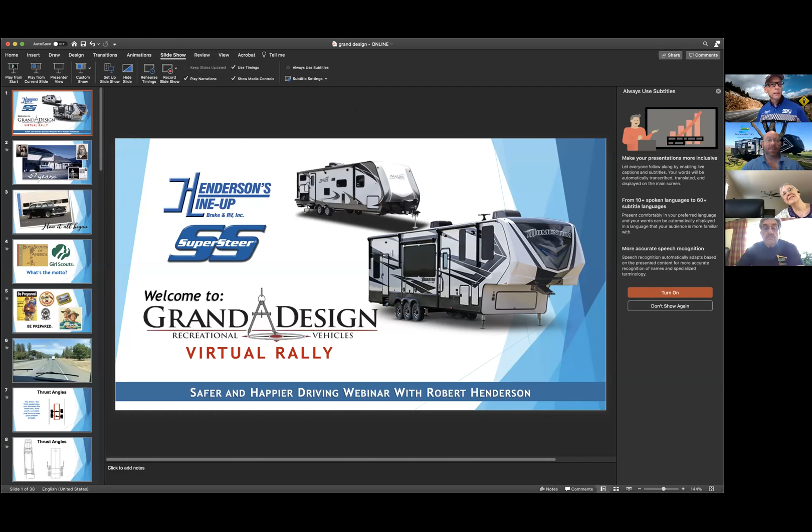All right, good morning, we are ready. Let's jump into this. Welcome to the Grand Design Virtual Rally, good to have all you folks here today. My name is Robert Henderson, and we're going to talk about safer and happier driving, and I'm privileged to do this with Jeret. Jeret's been involved in one of these with us earlier this year. You may not know it due to my technical ability here, but I usually have somebody doing all that kind of stuff for me. So we're going to jump in here and get started.

I'd love to personally meet each one of you - that's what I usually do when I do a seminar. I go around, shake hands, find out where you're driving and where you're from. I'll talk a little bit about where I'm from.

This is where we started out 57 years ago - maybe even another year on top of that now, actually. Well, it was, yeah, because we started in 1961. We moved up from Fort Bragg, California, and my dad was looking for a business he could teach his boys. He was actually looking for a parts house, couldn't find one, so he wound up buying this lineup and brake shop. I appreciate my dad, and I appreciate this. He was in World War II, flew fighter bombers, was in D-Day, the Battle of the Bulge, and so thank you to any of you who have served out there - grateful for you putting your life on the line. When I was a kid growing up, working for my dad, we literally grew up in the business.

My mom fed me with a brake spoon when I was a kid because her house was connected to our shop. So I love what we do and grew up around it.

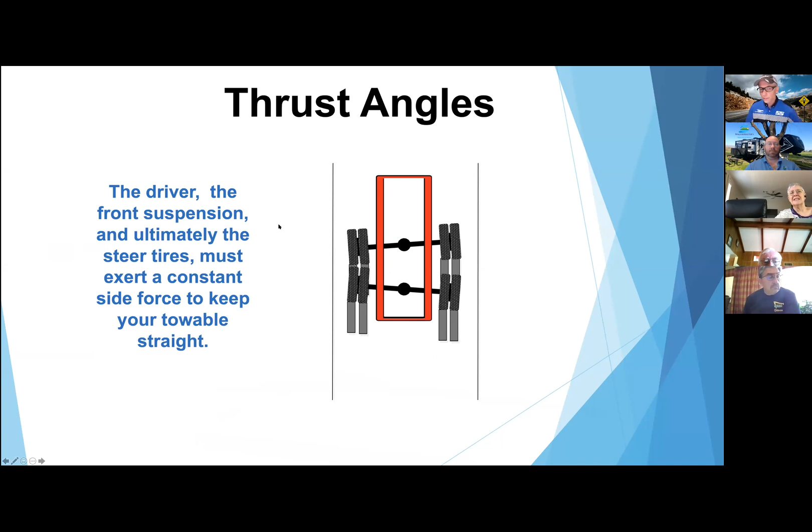So that's one of the things we like to take a look at - trailer alignment. We talk about thrust angles. The rear axles create thrust angles. The driver, the front suspension, ultimately the steer tires must exert a constant side force to keep your towable straight.

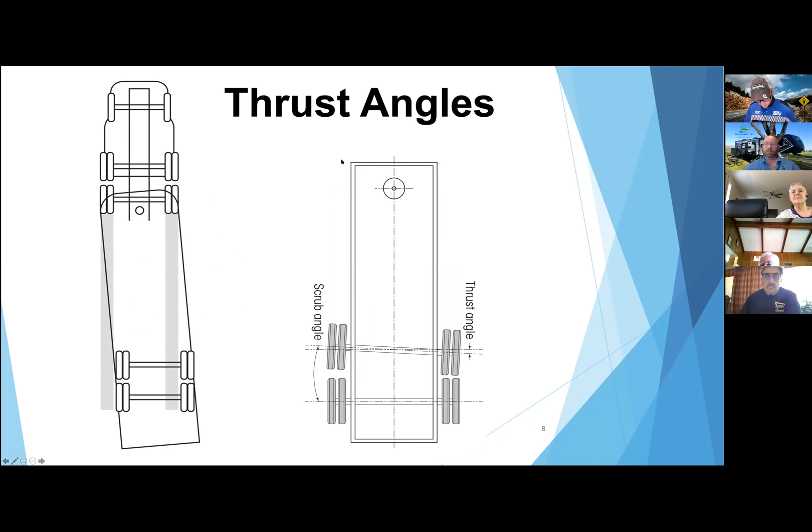So alignment's very important. When we do an alignment, we like to line everything up to either the kingpin or your ball mount when we do our wheel alignment, so everything's set in relation to that, and we get a very straight, true pulling trailer. We use the same equipment that we would use lining up a semi that runs 10,000 miles a month. Why is that important? It's going to give you better tire wear, and cut the air drag, better aerodynamics. So very important, trailer alignment.

Thank you, Barbara. And I really appreciate that my wife can help me drive, because I do have a little bit of problem with getting sleepy. I got this picture in my den on my wall. I tell people, when I die, I want to die peacefully like my grandfather did in his sleep, not kicking and screaming like the rest of his passengers.

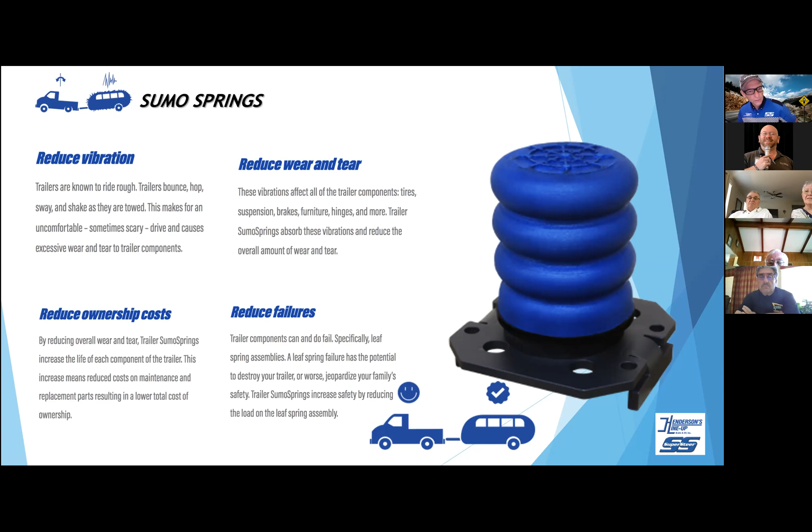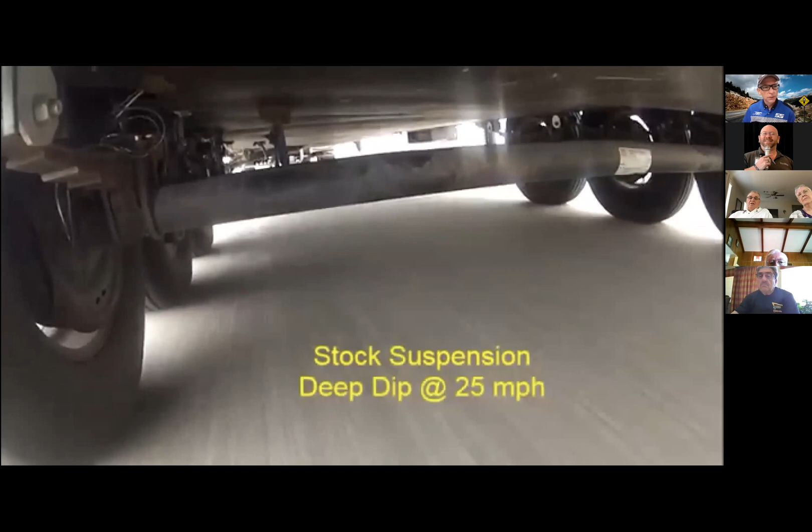I think I have a video coming up here. Let's see if it's going to play for us. This will show you Sumo Springs in action, I believe this is a triple axle trailer, a 3-axle toy hauler. You can see those springs really getting pushed there.

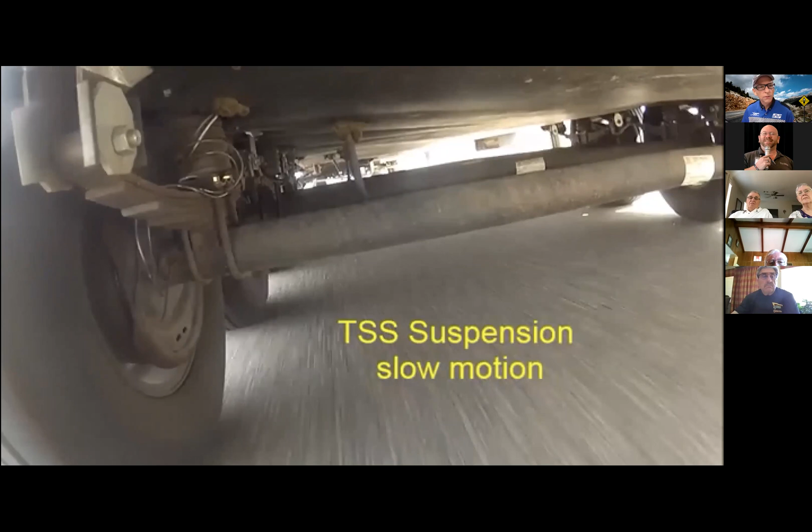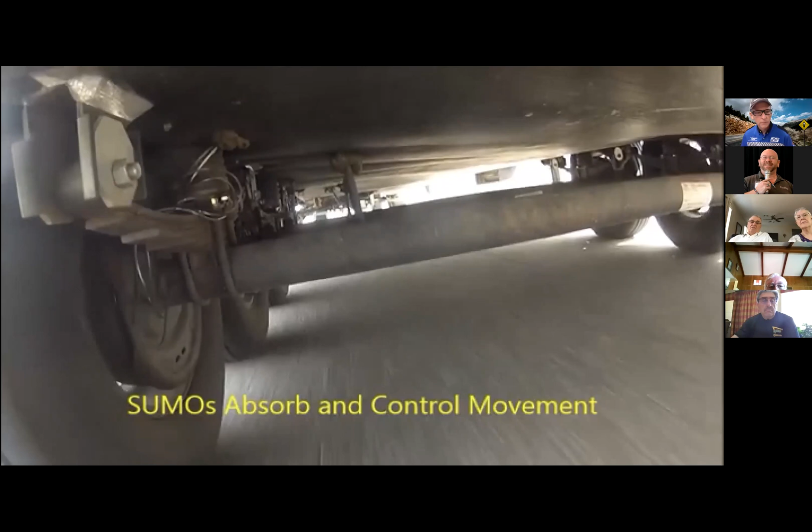I got slow motion, you see the sumo springs up in here, and there they are, absorbing that force, absorbing that energy. Sway dramatically reduced. It's interesting, if you watch those axles, you can actually see those axles flexing as well, how the camber changes over bumps. When you hit bumps, they're flexing.

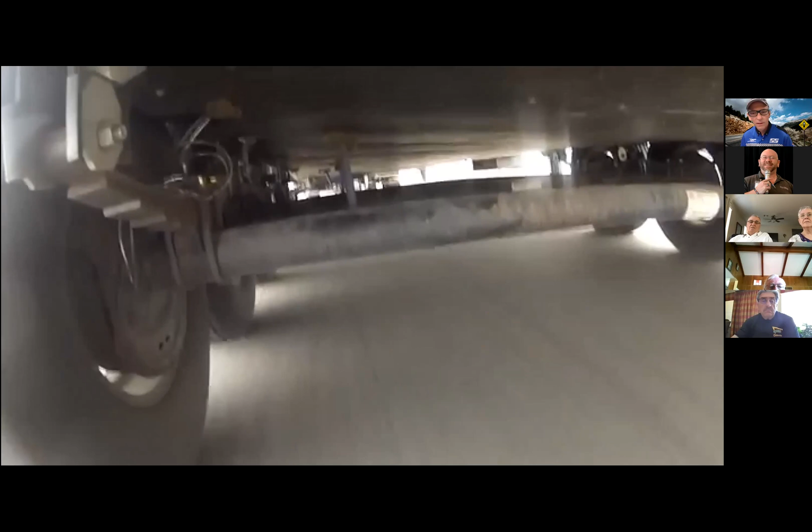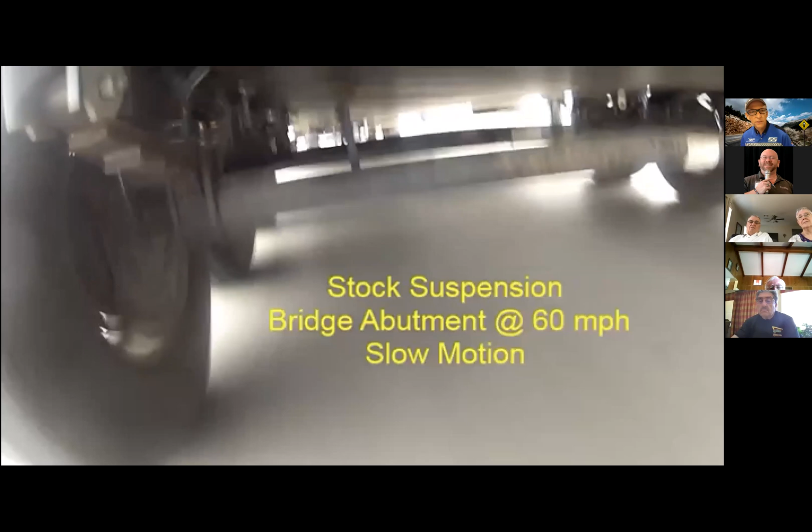Bridge abutment, and we love those bridge abutments, or there's some nasty ones out there. Stock suspension, you can see that thing hammering. Now, a lot of vibration. It's amazing the suspensions hold up as good as they do.

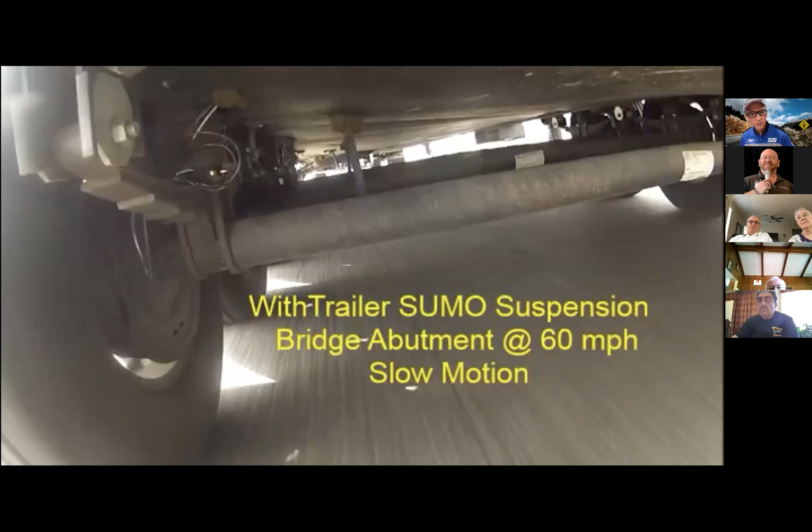Okay, now we have the sumo spring on there. Here it is up there. See, a lot of that energy is being absorbed into it.

Let's move on here. Some other products people talk to us about is the MORryde, and the idea with the MORryde is you're increasing your travel from 2.5 inches to a total travel of 4 inches. They also have another one called the SRE 3000, which gives you about another half inch of movement up and down. But the SRE 4000 has rubber inside of this box, so it's going to give it more travel, basically. There's also some different bushing options.

We see a lot of problems around these, especially the thinner metal shackles. We'll see witness marks where these have been getting loose and working around. There's so much stress put on a trailer when you're backing in and out, a lot of side load taking place on these things. So there's heavier duty, heavier cast versions that have a grease fitting, called a wet bolt. There's also some bushings they call never fail bushings, made out of a special Duralin material or something like that. It's supposed to be a lifetime bushing, while the plastic bushings usually only last about 10 to 20,000 miles before they're getting worn, depending on the weight of the trailer.

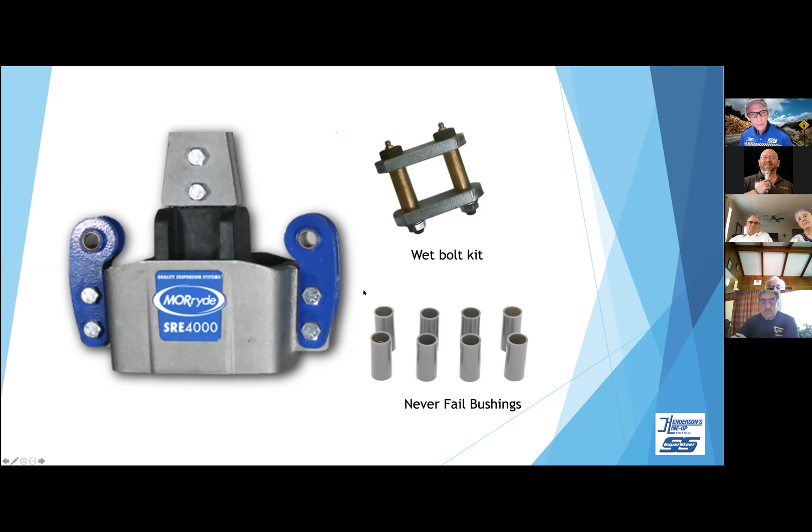Again, MORryde says it's all about the travel, that's what they're trying to do, is extend the travel. They provide up to 4 inches of travel, protect from damaging road shock, easy bolt-on installation, 3-year warranty, tested and rated for up to 7,000.

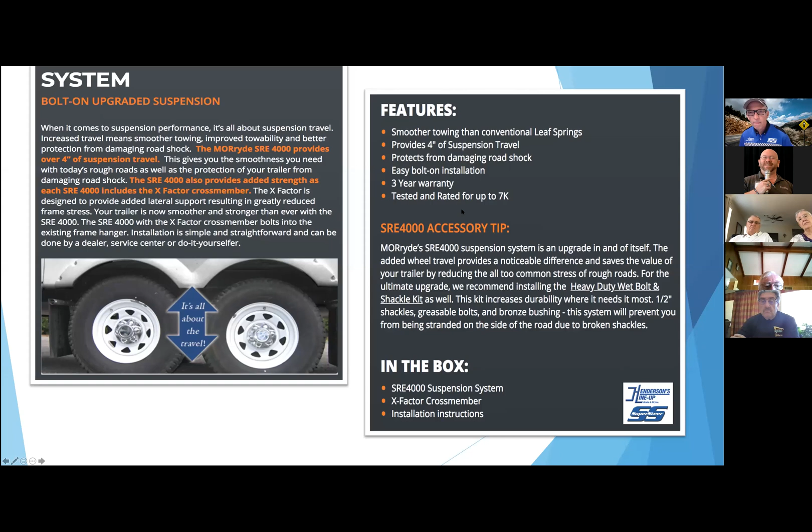Okay, now with MORryde, currently we're doing more MORryde independent suspensions than ever, so we're getting a lot of experience with them. This is their independent suspension where you remove the leaf springs completely, and this is a rubber shear block in here, so we're shearing the rubber back and forth. What's the advantage of it? Definitely a lot smoother ride quality, and you improve your control and handling, up to 5.5 inches of suspension travel, which is a good amount of travel.

Reduce vibration, even over the roughest roads, and it protects your trailer. If you can protect your trailer, all your walls, all your appliances and everything are going to last longer, and also it's going to be smoother in your truck up there as well.

So this is with the disc brake conversion. We're doing a lot of the disc brake conversions at the same time because the disc brakes work a lot better than the electric brakes. These are electric over hydraulic, so they have an electric actuator, but they're actually hydraulic at the wheel, and they do provide far superior stopping.

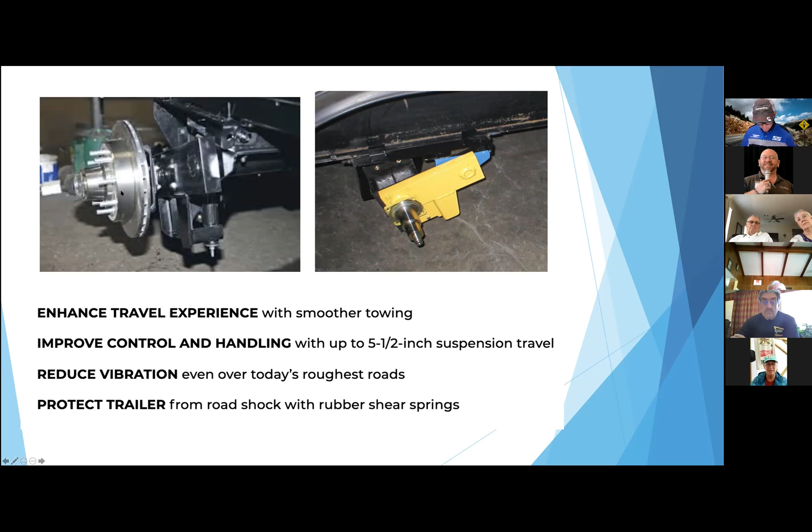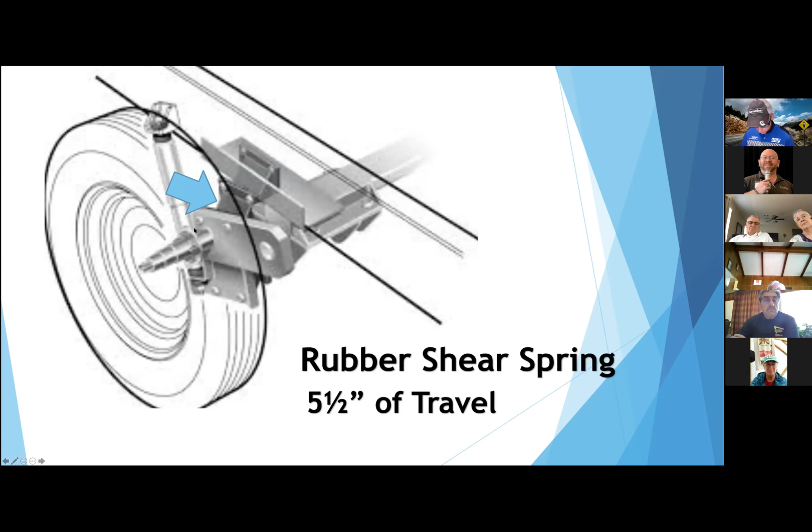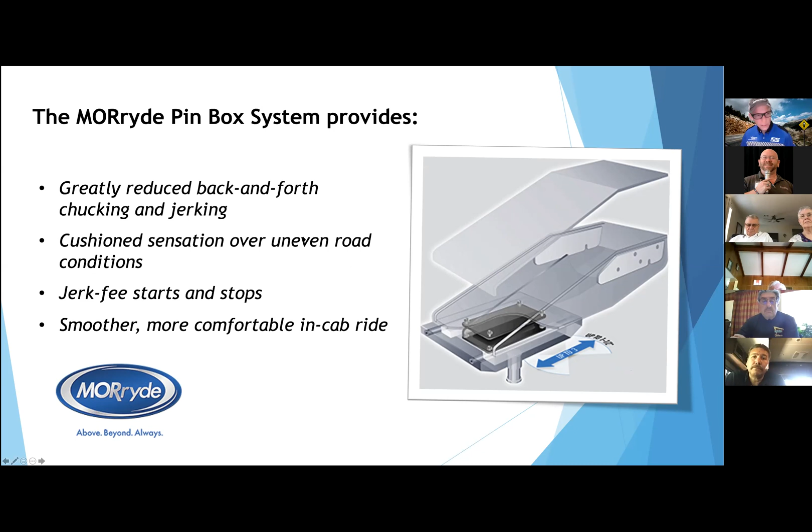Another option we've done to help people on rough roads, about half the price of the MORryde independent suspension system, is the Roadmaster Comfort Ride slipper spring. We helped bring this product to Roadmaster because the other folks building it weren't doing a great job with product quality and production. The nice thing is you go from 14 moving parts down to just 4 with the slipper springs.

No longer do you have the equalizers. The springs aren't tied to each other. The springs are free to move independently over a bump, so that's nice.

Their claims are a 50% reduction in road energy, 76% reduction on cobblestones, and 94% reduction on gravel roads. So it's low maintenance - 10 of the 14 moving parts eliminated, lifetime lubricated bushings, and we've been having good success with this as well.

It does come with a set of shocks. You can buy the shock kit separately from the Comfort Ride Slipper Spring, but you get the full benefit when you get the slipper springs installed. Again, it reduces the chance of spring breakage, and if you get the shocks with it, it's definitely going to handle better. The shock mounts are built into this - you can see the shocks aren't installed in this picture, but there are shock mounts built in as well.

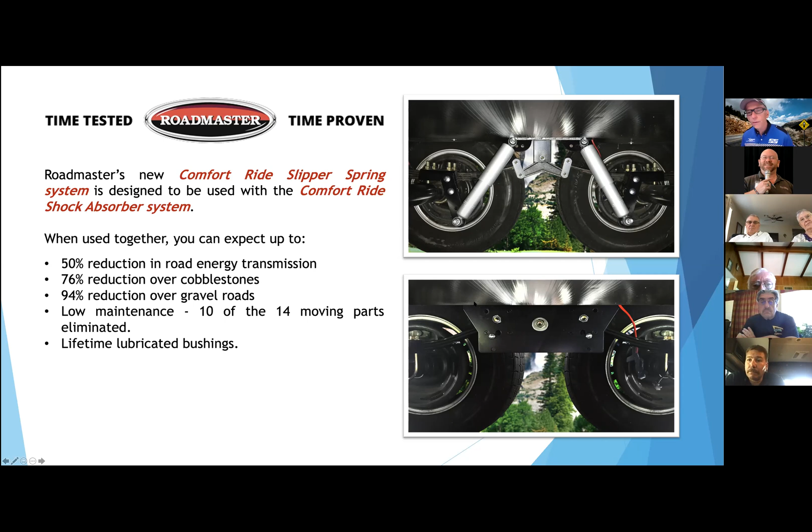There's a picture of a slipper spring. It's riding on this roller, so it should actually be called a roller spring in a way, but that's the idea. Some of them use a Teflon block there, but these actually come with a roller in there.

If you have these installed already, one of the things we've been watching is making sure your rollers are rolling properly. We've been talking about changing these to a different design, and we may start doing our own. We've had some problems where people tighten these bolts down and the roller isn't rolling properly - it's sliding, wearing out the metal surface and wearing through the coating on the steel. It's got an anodized coating, or some kind of coating on there. So if you have those, you might want to check and make sure they're wearing okay.

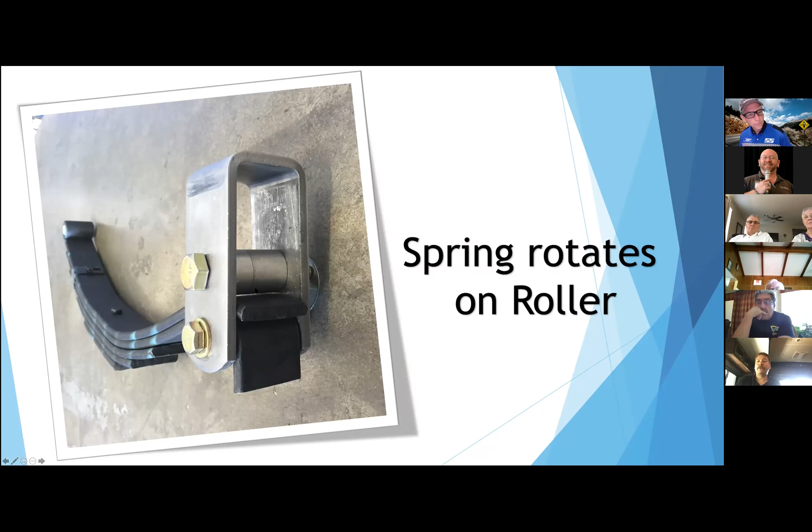We do trailer inspections at the shows, and when we get back to doing some live rallies again, Jeret works with us, and we have a sign-up sheet, so we'll do a visual inspection on your trailer and truck. We'll check all the components out, weigh it if you want to pay to have it weighed, then check your steering and suspension on the truck as well, and see if there's anything we could recommend that would make a better marriage between the two.

Don't get any ideas, Jeret.

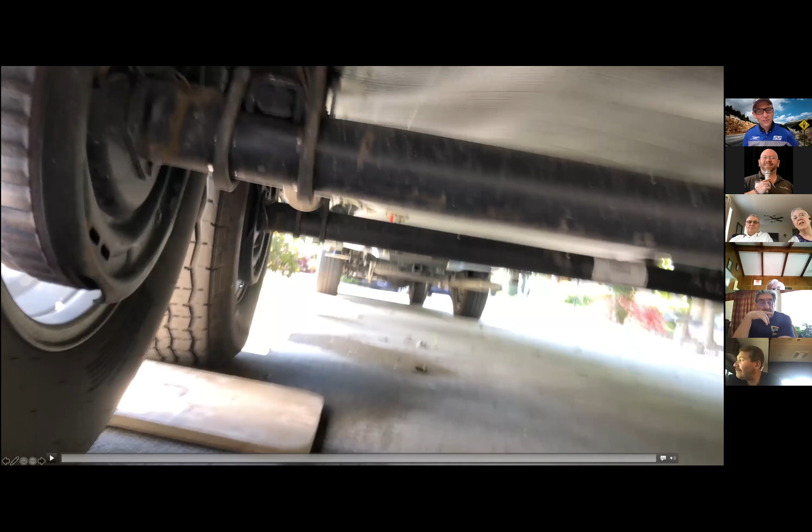So this is actually at a Grand Design rally. This is video I took, and I'll go ahead and play it.

We were underneath checking a rig, and it was interesting with this gentleman I talked to. I asked him twice if he was having any problems with his fifth wheel. He said, no, I have no problems, no concerns. So I'll go ahead and play this video.

What year is this fifth wheel? 18. So I'm underneath a 2018 Grand Design, and we were just doing our normal weighing. Customer had no complaint. And one of the things we always do when we're doing our weighing is a courtesy inspection, looking things over.

We discovered that this one here is just about ready to blow the rear tire. He said they've only got a couple thousand miles on it - yeah, around 3,000 miles on that. Something with the delivery. You can see all the steel cord showing on this thing - it's not long before it's going to blow. Looking at this rear axle, it doesn't look like it's sitting in there right, almost like the spring center bolt. Sorry about that, I was crawling underneath there at the time.

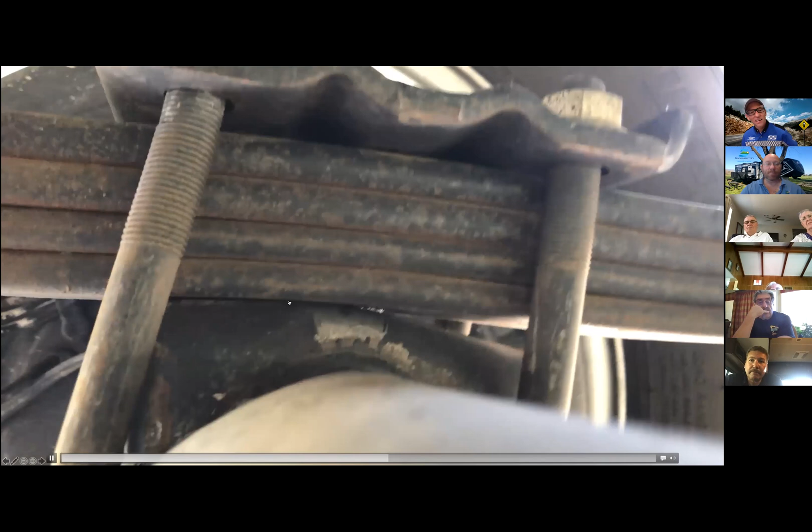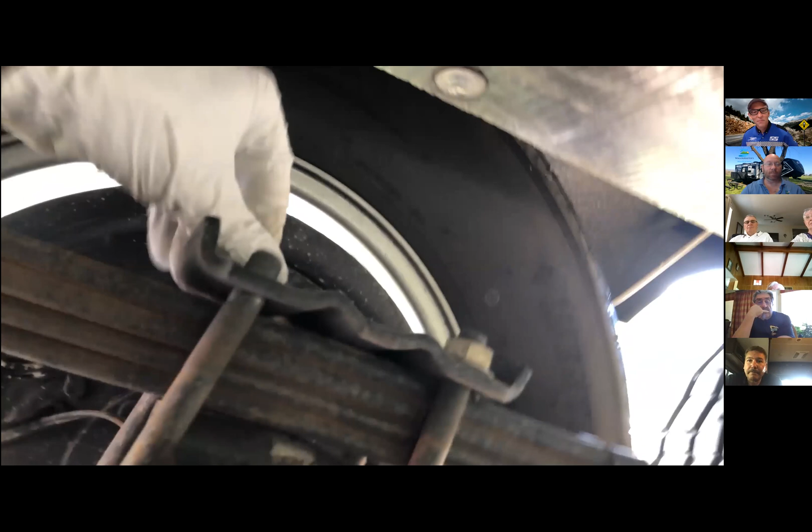Look at this up here. You can see that is not sitting flush. Crushed the actual... oh look at that. Listen, U-bolts were loose, the nuts are missing. Look at that, Rich, the nuts are actually missing off of it. You're ready to lose this whole axle on this thing. And I have to say, Grand Design went the extra mile on that one.

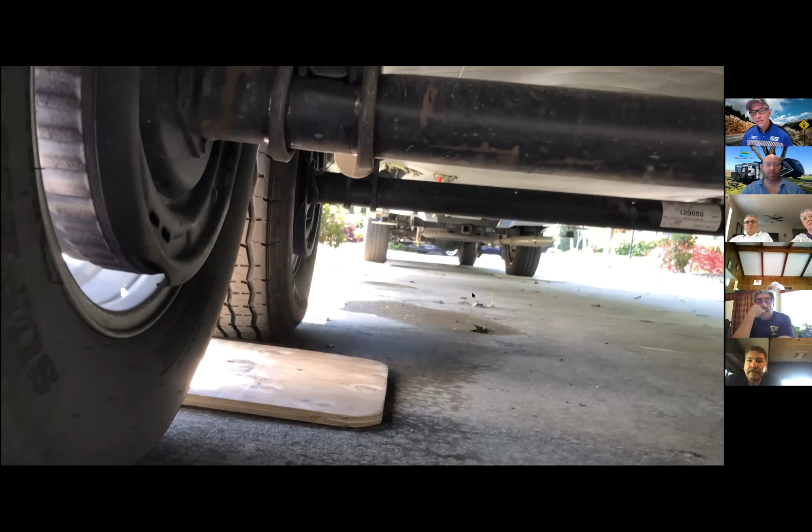You see where the paint's gone off of there, it crushed it so hard. And these nuts were ready to fall off as well.

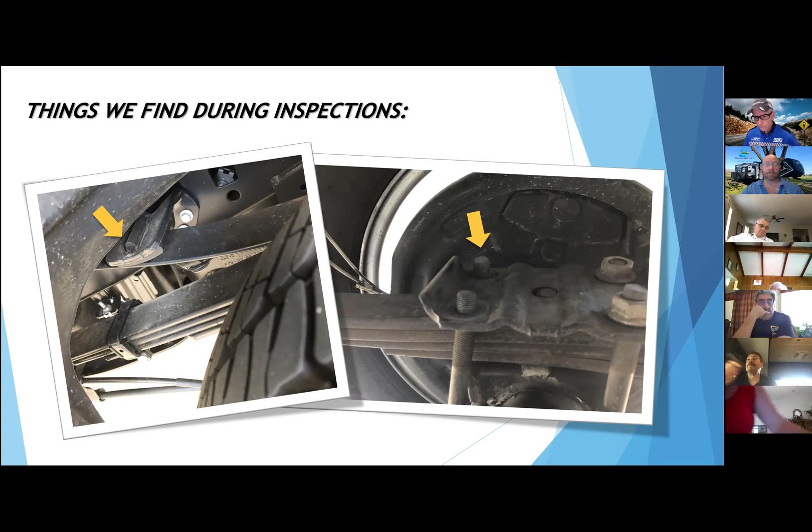Sometimes if you're riding half and half, they kind of slap. But if you put the Sumos in there, it'll make the whole assembly more level when you're towing, so the truck won't squat. But we look for all kinds of things underneath there.

This one here, we found some of the early design shock kits. They were cracking, you can see where we had fractures in that. And that was one of the reasons we wanted Roadmaster to start building that, so we knew their stuff would be better.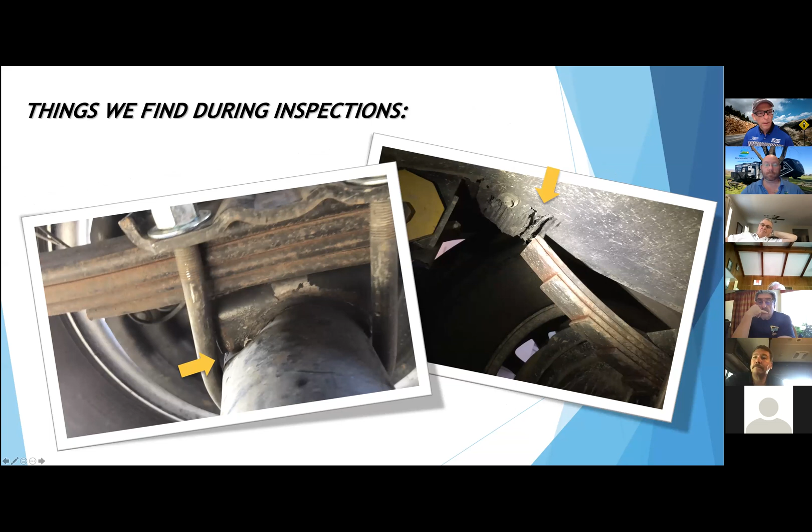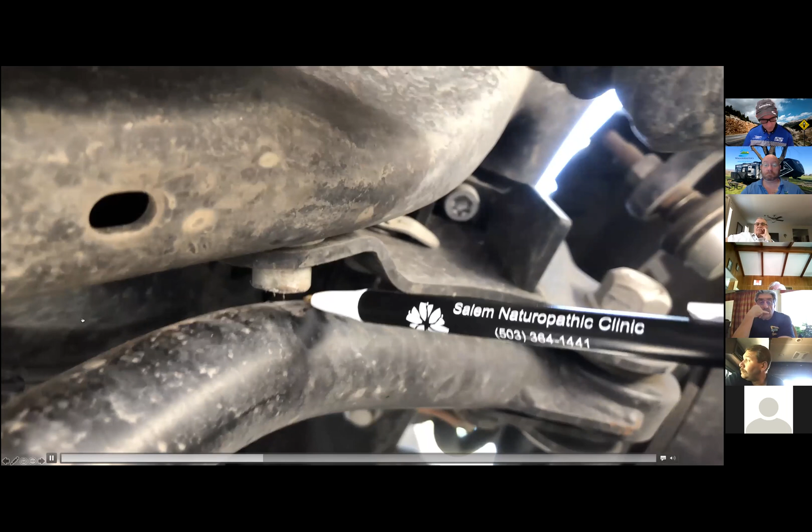This is actually on a Dodge truck. And I discovered that the track bar was actually rubbing on this rivet in the frame, like that. So it actually had been hitting while it was out on the road. Excess loads being put on it was causing that to hit.

So we look for those kind of little detail things when we're doing our inspections.

Yeah, and this is another one. Another thing that we ran into on these Dodges is that these jam nuts were coming loose, and the factory tried a bunch of different things. The last time I saw them, they were actually spot welding the nut onto the drag link, so you would not be able to adjust the center on your steering wheel if those were welded in place. The idea is having this adjustable. If your steering wheel is not on the high point of the gearbox, you can adjust it, but they've been having problems with this style nut coming loose, and they needed to put like a Belleville washer or something like that on there, and they didn't do it.

Here's our RPA forms, the road performance assessment forms for the trailer. What we're going to check for: pull, play, wander, harsh ride, sway, bucking, bounce, vibration, any noises, check the brakes, acceleration, lane change, look for tire wear, ride height, suspension type.

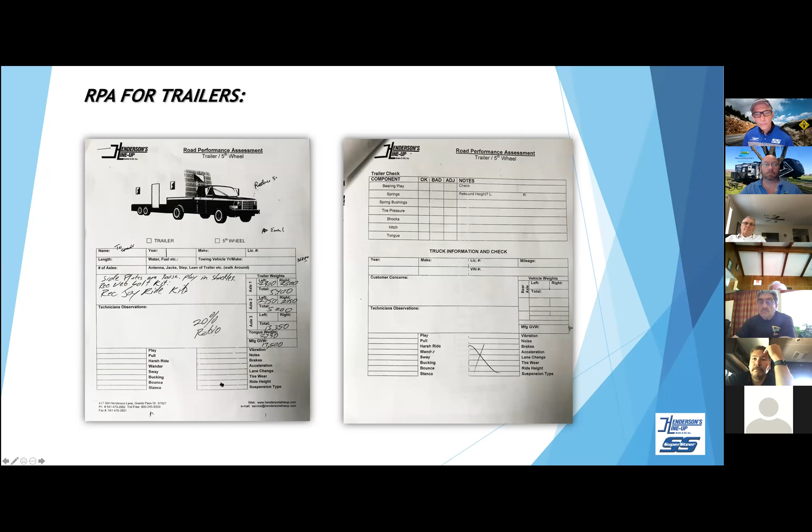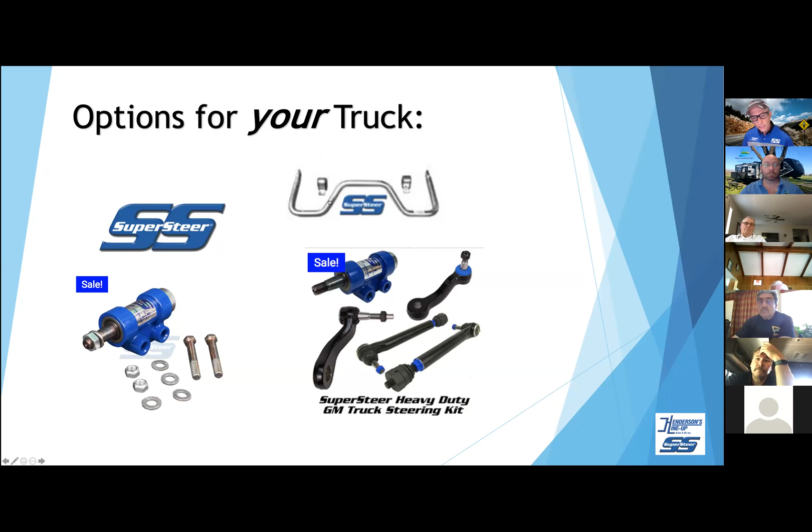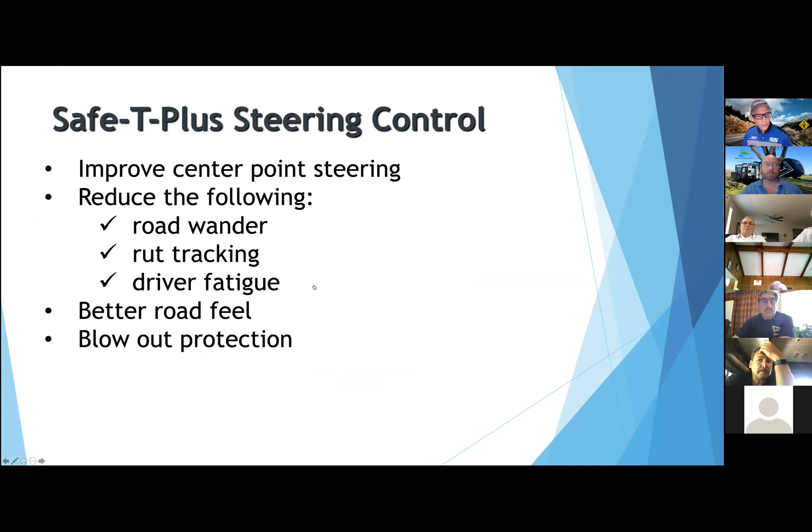And we do a lot of things on the trucks. We have idler arms for the General Motors trucks. We do a lot of heavy duty tie rods to replace them, anti-sway bars, and we also do a lot... we have a picture of the Safe-T-Plus, it's another product for blowout protection that we use where it will fit the trucks. You drop a tire off in a ditch, it's going to protect you for road wander and rut tracking, driver fatigue. It gives you much better center point.

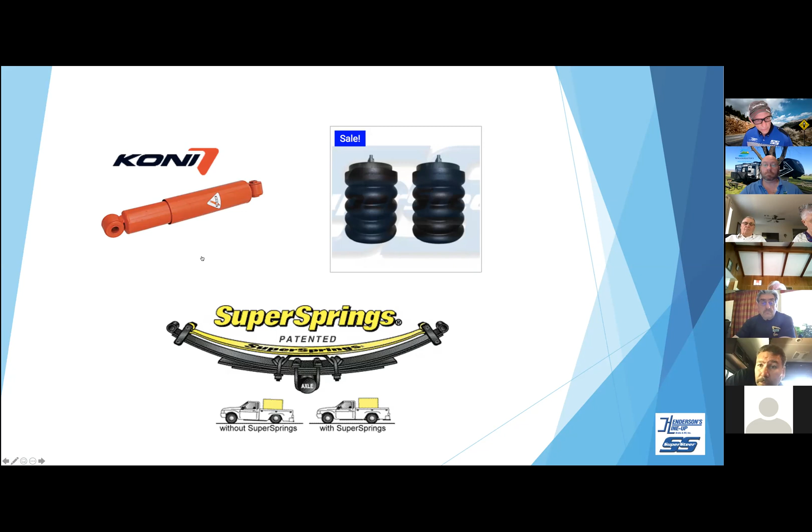Super springs, another product that we use to carry the load. If we can beef the spring up itself, we'd like to beef it up at the spring rather than using airbags. So if we can get away from it, I like the super springs because they do have rollers in the eyes, so when you're unloaded, it doesn't ride as harsh. Airbags have a tendency to leak, so we try not to use them unless we have to. We know there's certain places where air springs are great, but we use a lot of the Koni and Bilstein pickup shocks, and Andersen Hitch is something that I just like because for those of us who like to be able to use our truck, this is a great option for lightweight, so you can continue to use the back of your pickup.

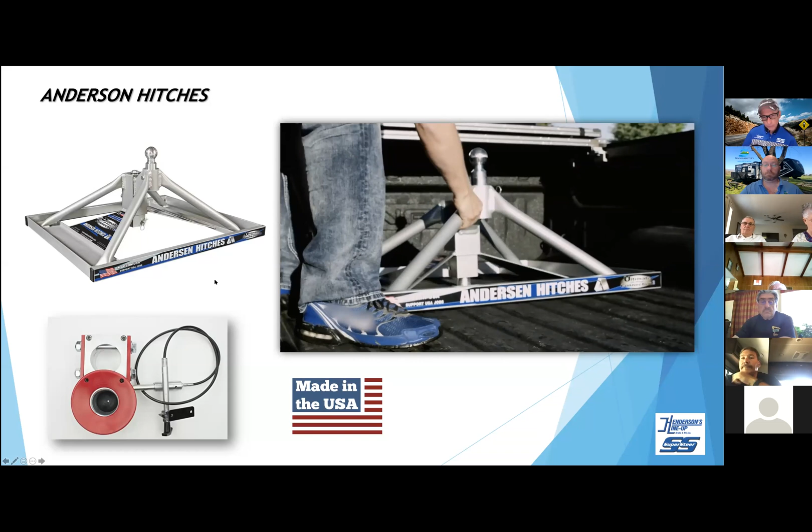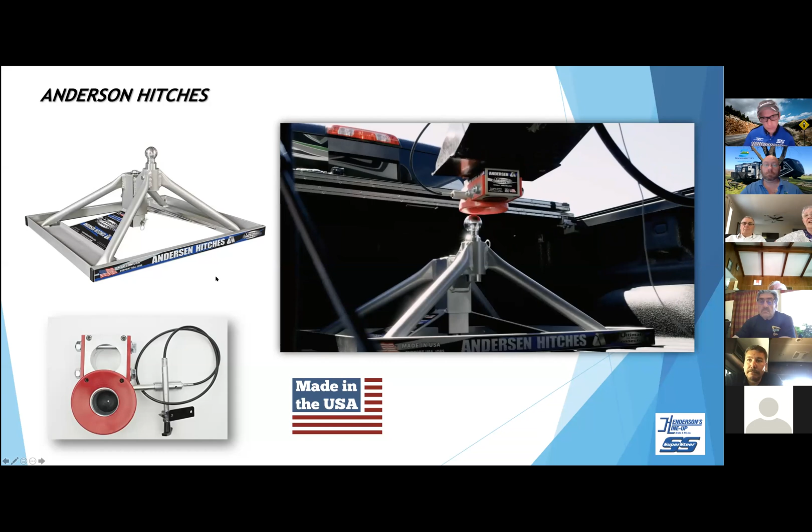The ultimate fifth wheel connection gives you an incredibly smooth and quiet ride. We've eliminated the struggle so you can spend your time creating memories that will last a lifetime.

Right, I wanted to show a track bar there. I guess I didn't have one in the presentation. What a track bar does is it ties the rear end to the frame, the housing to the frame, and helps keep it tracking straighter. We find that any vehicle we can put a track bar on does better for towing, even unloaded.

You'll notice about a 20% reduction in sway around corners as well. For those of you doing bumper pulls, it's more important because the weight's back there on the bumper, so it's working against the axle more.

With a fifth wheel, you've got the weight right over the top of the axle where the kingpin is, but they still do benefit from track bars. Even trucks with dual wheels on the back, when we put a track bar on there, we can still feel the difference. But it's a little more critical when you're bumper pulling with single tires on the back.